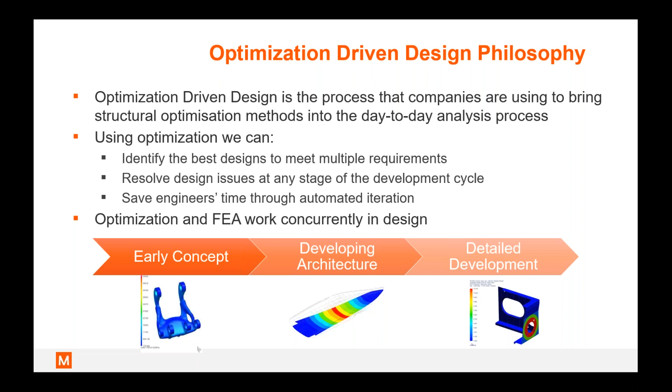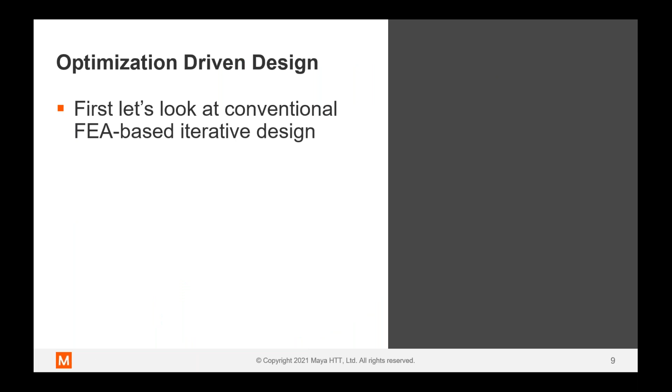So in terms of how it works, what we're talking about when we're referring to this FEA-based optimization philosophy, if we first start off by taking a look at what we do already. Now, this in itself is an amazingly powerful workflow using simulation tools to predict performance and to engineer in the virtual world. This is something you'll see in Simcenter as a very broad spectrum of capabilities. You've seen some in our last webinar as well. But here with FEA, this is the workflow that we typically follow.

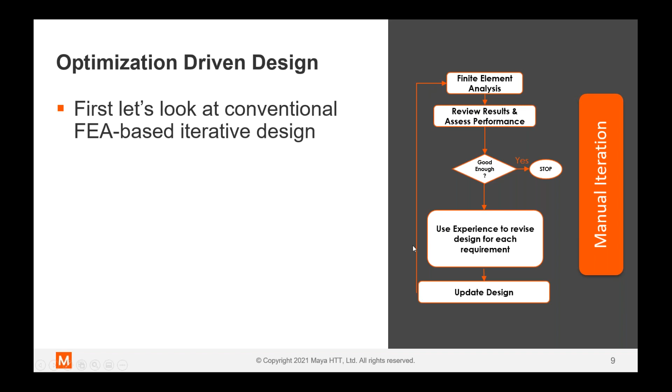So we'll do an FEA simulation. We'll take a look at that performance. What are our stresses? What are our displacements or natural frequencies? How is the part performing? And then we go through and we say to ourselves, is this good enough? Is this meeting our performance target? If it is, we stop. If it's not, then we're going to use our experience and maybe some calculations to make a decision on how we're going to revise a design before going back to design, updating our master design or making some manipulation of our models and redoing the simulation. So this is pretty much how it's done through simulation, iterating your designs.

And if we take a look at optimization, the flowchart now I'm showing is one that's describing what's happening in an optimization solver, in the ones that we're going to be talking about today. So really, similar things going on, just with some different names and some different tasks. So we do our FEA analysis, and then we're reviewing now what we're going to be calling our goal or objective, and also checking our constraints. So that's essentially the optimization, reviewing performance. Then we look at convergence. So that's the optimization evaluating, is the performance meeting the criteria? Do I think I've got it as good as I can?

And if I do, I stop. And if I don't, then we're able to internally calculate sensitivities, which is how a design response changes to a design change. And with that information internally within the optimizer, it will then perform an optimization to say, how should I change the design within certain limits before automatically updating my design and looping through to analysis.

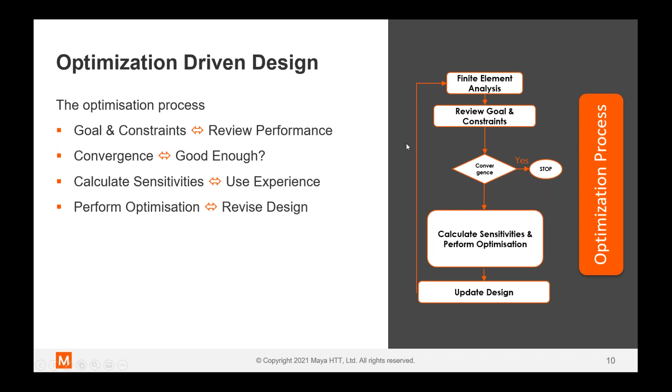So essentially, if you put the two processes side by side, they're really very similar. Some of the key benefits with the one on the right are it's automated. So we're automatically evaluating responses. We can automatically update our design and remove the need for a human to have to iterate in the process. And the key thing here is obviously communicating the right information into the optimization tools so that it is iterating in the right way and going in the right direction. And that's part of what I'll aim to discuss and show you today.

And one of the key strengths you'll see with the optimization solvers is their ability to consider multiple load cases. This is a really important one and a big one, particularly on EV systems, where there's a lot of competing requirements that we need to satisfy in our design.

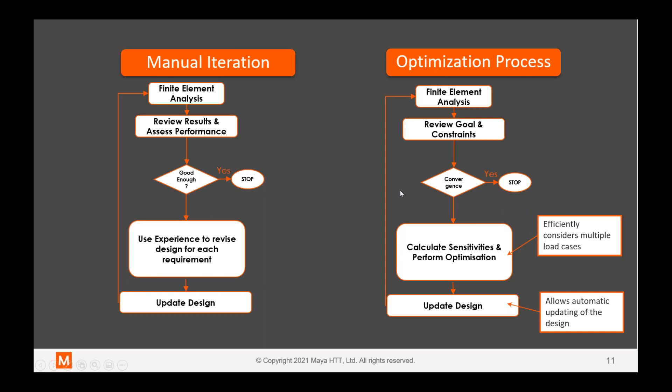So why should we use these tools? What's the benefit for us, really? Why do we want to take it on? First of all, when we use them correctly, we can develop designs faster. In theory, better designs at the same time. And what we're often doing is looking to maximize the potential of our designs, particularly focusing on the manufacturing method, the design approach that we've assumed for the design. So good examples would be a casting, where we can tune and tailor the thickness of a part. With castings, we do have that flexibility. So taking advantage of that and connecting that flexibility in manufacture with a tool that can really make the most of it is why we should use optimization.

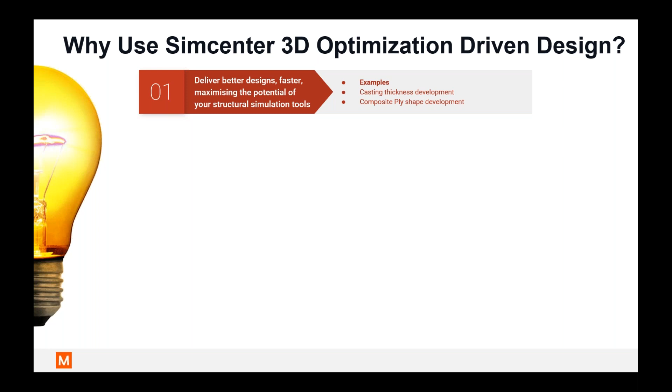And if you are working in the field of composites, we won't discuss it much today. There's a lot more to be discussed in that arena. But if you are, optimization and composite materials really do complement very well because of that inherent flexibility in the material and how you can tune and tailor the performance of your structure. And you have an optimization tool that can manage that within it.

A big one that's often not talked about with optimization is saving time and freeing up engineering time. If the task is to iterate the thickness of a part, doing that through simulation after simulation takes time, and setting the goals to an optimizer and asking it to do it for you simply frees up that engineering resource, as well as getting the best design across multiple load cases.

You can see that being able to tailor your design to meet multiple requirements is really quite key. As you'll see in some of the examples, we can optimize for stiffness, stress and vibration all at the same time within the optimization, developing the best compromise against these requirements.

We often talk in optimization about minimizing mass. This is really key when you start looking at mass budgets for electric vehicles. If you go a little bit over on each of the different systems, all of a sudden the total vehicle weight is escalating, so keeping that in control is key.

It also lends itself to material usage reductions, which inherently lead to cost reductions. So even just something as small as a 5% reduction in material can have a really significant reduction in material costs in manufacturing.

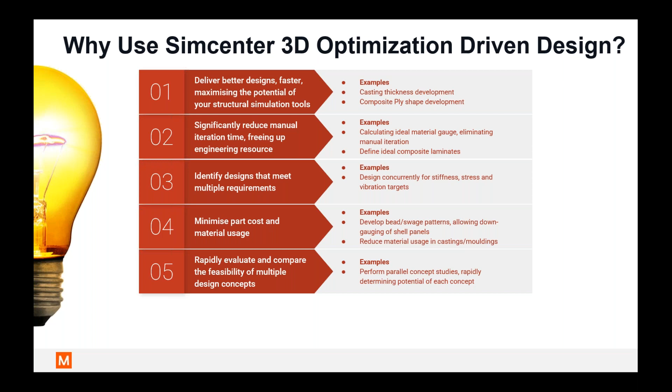In terms of using these tools, my personal background is I've used them a lot in competition applications - areas such as Formula One and motorsport, and in marine with the America's Cup. In that arena they're really focused on performance, that's the driving metric - can I get a little bit more performance to go and win? But the tools themselves are so much more than that. They're making the engineering process more simple, solving problems, reducing material usage, and saving you time along the way.

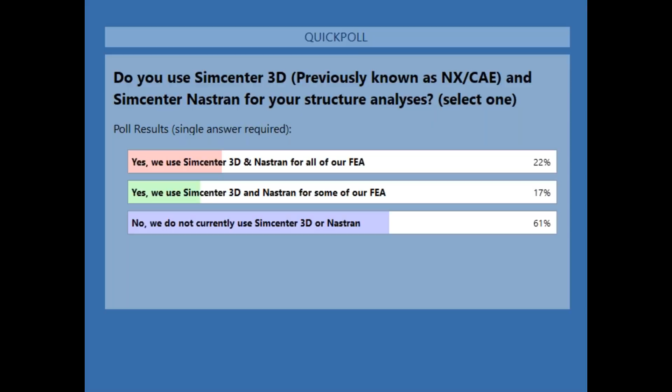Excellent, okay, so that's great to get that feedback. Before I go into these next few slides, it helps me to understand the audience and what I need to be updating in terms of the tools. So I'm going to give just a short introduction, a few slides now on Simcenter 3D, Simcenter Nastran, and OptiAssist, which is the product we're talking about here for the optimization technology.

So the big question is, what is Simcenter 3D? Even if you're not using it, maybe you already know what it is. When I got involved in working with Siemens and Simcenter 3D, and I went to their first conference, I was amazed at how many disciplines it covered and how comprehensive it was. You can see on the image on the left the different arenas where simulation can be performed within Simcenter 3D.

And the key basis of it is this common engineering desktop to perform these simulations. That's a really key strength. So you can be running from a single design out to the different disciplines and different solutions, and each of these has some significant, powerful, and reliable solvers for each different discipline.

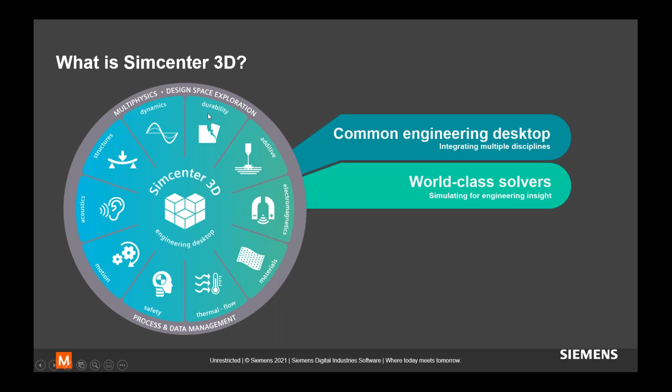Today we're focusing, where are we on around the clock? In structures - that's the primary area for today. But as you can see, particularly for EVs, this is really a powerful set of tools.

From my experience, the biggest strength of Simcenter is its integration of all these tools together, having the ability to manage your design within NX, if that's your chosen design platform, and then connecting through to Simcenter is really key. But even if you're not in NX and you're just working in the Simcenter environment, having that common platform is really a key strength for managing your data and connecting all these simulations together.

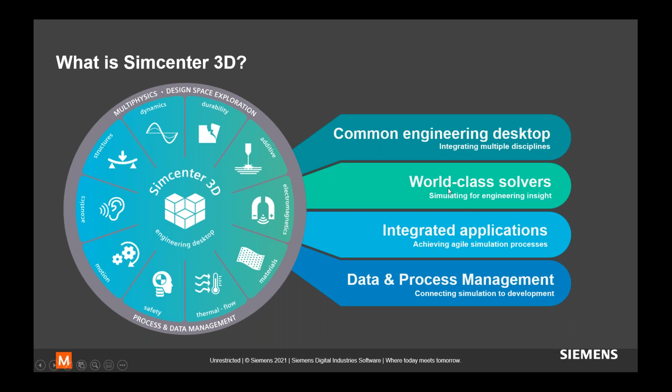So in terms of what this means for EV developments, that's quite an important question for today. The key thing with engineering electric vehicles is there's a lot of technology and methods common to IC engine vehicles, but also a lot of new technology, and simulation techniques are developing all the time. If you joined us for our last webinar in this series, you'll have seen some methods available for battery modeling in terms of various calculations for thermal management, energy calculations, and so on.

Further to that, as we'll go through today, it's got real depth of tools for structures, but also in terms of motion, driveline simulation, dynamics, acoustics, and EM calculations for EVs. So really quite an extensive range of tools for all of your simulation needs.

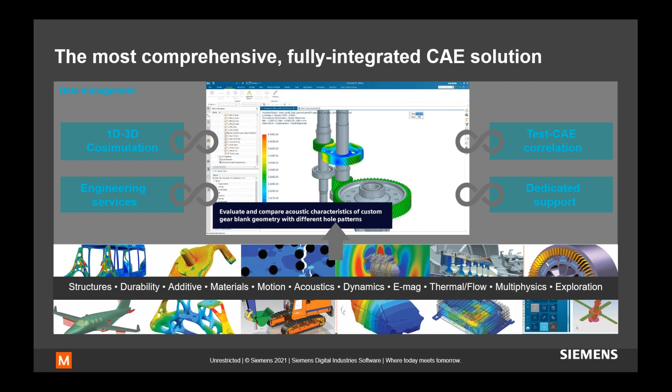So I guess, how does that help you? That's the key thing, really. I think the key thing is the tools allow you to model either using efficient, lean simulation tools to get fast simulations, or to delve into the detail if you want to and model in great detail some of the complex systems in your designs. So that's all available to you in the simulation tools available in Simcenter 3D.

These last two points are quite significant for what I'm going to talk about next, which is how the tools are all integrated together, which is where OptiAssist fits into Simcenter, and we can explore our designs through the optimization tools we're going to be showing you in just a moment.

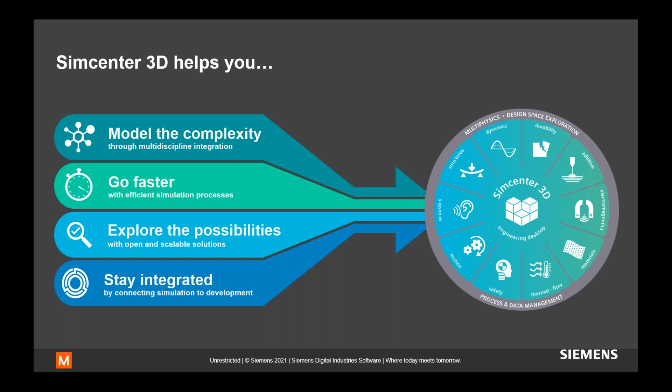So that leads me on to OptiAssist. As introduced, I work at GRM Consulting, a company in the UK, and we are a technology partner to Siemens Digital Industries. We develop OptiAssist for Simcenter 3D, which is an extension to the Simcenter environment, bringing structural optimization tools available to you within Simcenter.

Really, what we're looking at on the screen now is how the tools enable you to change your design. In each case, you're going to be setting a goal for the optimization you're trying to do - minimize mass, maximize stiffness or frequency - and then you can set constraints and targets to meet. But in each case, you want to tell the optimizer how you can change your design, and that's what we're looking at for these methods.

These will become more apparent in the demonstrations I'll be going through shortly, but just to highlight briefly: we have the ability to add form to thin structures, to optimize for thickness on each panel, to optimize through varying regions of your structure for castings and moldings, to tune the geometry of a design through FreeShape, and then to optimize your laminate definitions in composites.

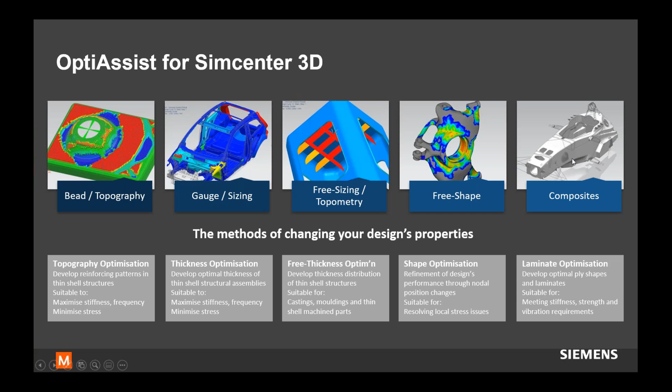So on to the question itself, lightweighting EVs. Where can we use this technology, and what do we want to lightweight? If we take a look at our systems, one we will look at today is lightweighting your battery housings. We're not going to look at the battery technology itself - we want more the housing, which has to be really quite a strong structure. There are a lot of different international requirements for the battery housing and its structural integrity, so you've got to make it strong but manage the weight at the same time.

Next, the EDU, so the transmission housings. These are often very large, heavy castings, and there's a lot of torque going through these electric drive units. So managing and maintaining the stiffness is really key, along with the strength of these housings. Again, maximizing the efficiency of your materials is going to be a key area to take advantage of. Suspension components - we'll also look at that today.

EVs are not always the lightest vehicles. I think we all know the challenges we're facing with the technology we have to carry on board. So making sure that we maximize the efficiency of all the suspension components so that they're strong enough, stiff enough, and yet coping with the loads in a weight efficient way.

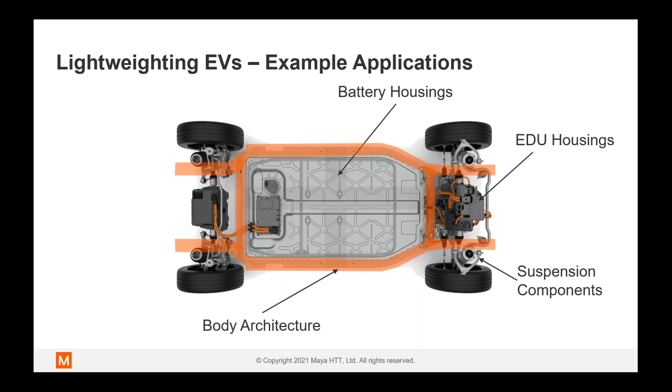And then a pretty major one, a lot of OEMs focus on this because of its inherent nature as the fundamental backbone of your vehicle, and that's the body architecture, the body in white of the EVs. This is a different architecture logic to conventional ICE engines because of the platforms and the systems we're embedding, and you see that with the developing vehicles out in the market today.

And then lastly, something that's often not really focused on, but there's a lot of mass to be saved, which is the interior structures. So here we've got seats, center consoles, instrument panels, a lot of metalwork underneath to manage, and even the trim parts themselves can be managed. So there's real opportunities for weight saving in this area as well.

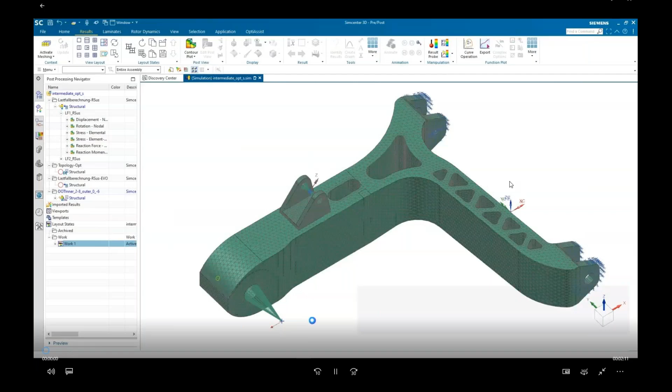Now, they've used the techniques for several applications, but what we're going to focus on now is just one demonstration of how they've used it in one of their earlier developing parts on a suspension swing arm. This is the rear swing arm for their single rear wheel in their solar vehicle, and this has been simulated in NX and Simcenter 3D.

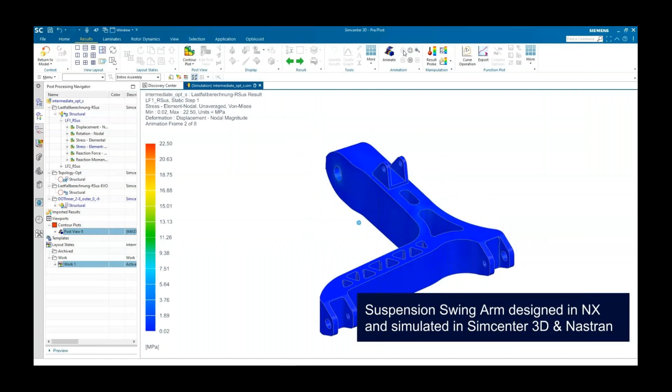Here we're just going to take a look at two of the load cases that they're studying: a vertical load and then an axial load that actually causes this lateral bending of the part that you can see on screen now.

So in this particular instance, they have developed the part such that it is now meeting performance, and they want to investigate how they can maintain the stiffness of the part but take some weight out. This is what they're going to do.

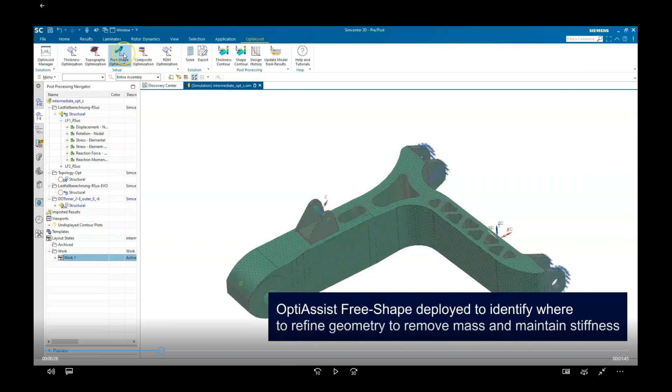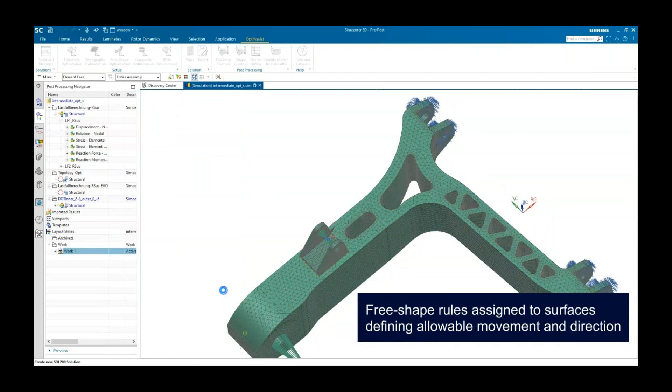They're going to utilize OptiAssist free shape optimization technology and allow it to make changes to the surfaces of the part, adding or removing material in small amounts, to see where it wants to refine the design. First, you can see on screen the inner holes are allowed to move in and out by a prescribed distance in their normal direction. Then on the outside, only selected regions can be moved, again by plus and minus 3 millimeters.

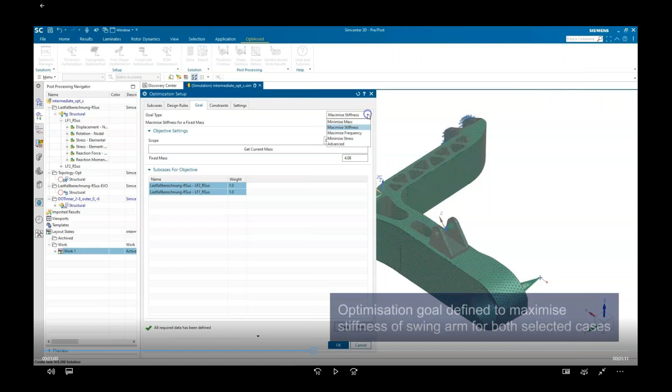So in terms of what they want to do, as you can see in the interface, we're walking through the setup process, and this is how the optimization is set up. In this particular example, they're looking to maximize the stiffness of the part, so you just choose that as the goal for the optimization.

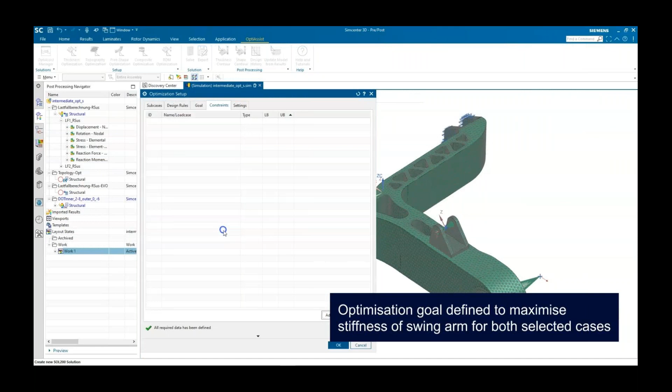Then what they've done is said, well, I'm going to define a mass for the part that's 15% lower than my current mass, so go and be as good as you can. That's the target they want. In this particular example, they haven't defined any specific constraints for stiffness or stress — they just want to make it as efficient as possible while achieving that 15% saving.

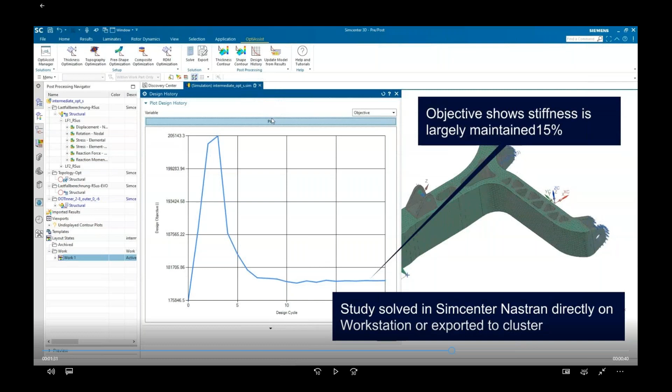At this moment, they've run the optimization within Simcenter Nastran, and once they've got the results, they're plotting their objective function, which is their goal, and they're also looking at the constraint, which in this case is their target mass. What you can see in this graph at the moment is, while having an initial increase in this compliance response, it's then brought back down again to almost its original position.

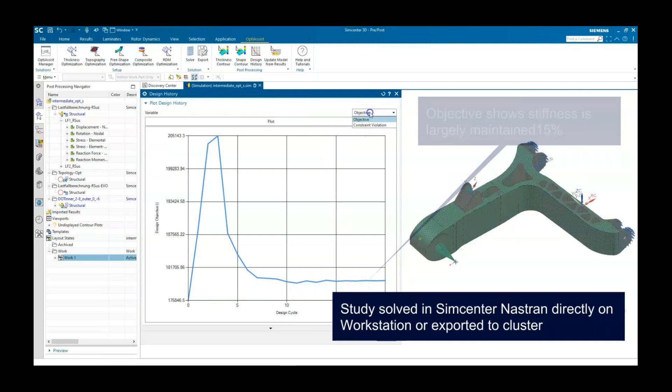So we've seen largely no change in the stiffness of the part, but the constraint, which was our mass, has been reduced from a violation of 15% down to 0, giving us that improvement in weight reduction.

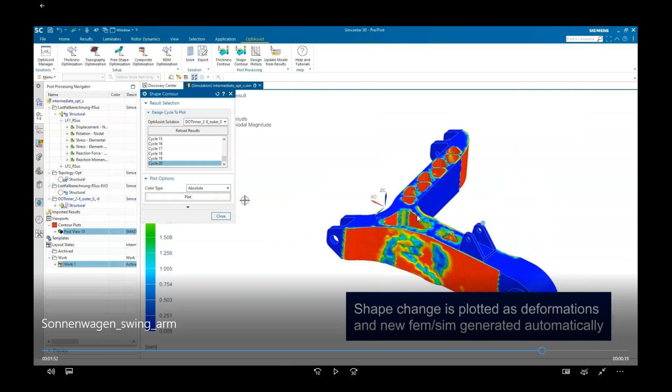And what you can see now on screen is where it's looking to change the surface position. Anything shown in red is where it's moved material either in or out—in some cases to reduce the mass, and in other areas around this hinge point it's actually brought material out to improve the stiffness.

And then once they've got that, if they want to surface that back to design so they can engineer around it, they can update their FEM and SIM directly from the geometry, and you can see how the mesh has been moved away from the surfaces to identify that best updated geometry.

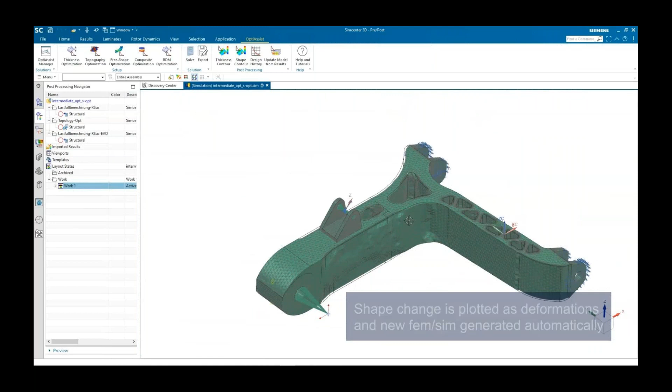So it's as easy as that, really. And actually, all joking aside, it is as easy as that. It's not something that is separate to your day-to-day analysis. You're doing the simulation anyway. You've got this model in Simcenter and you've analyzed it in Simcenter Nastran. To add the optimization in there, it really is straightforward.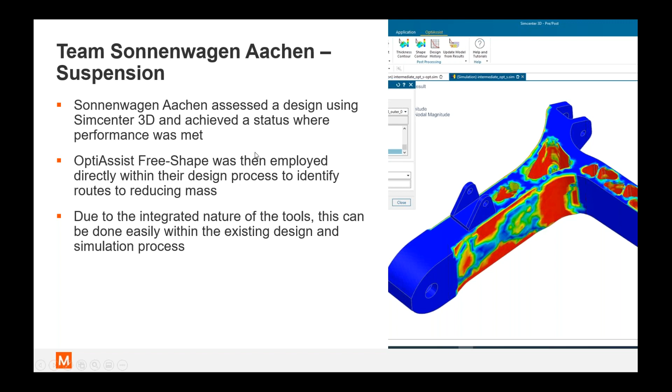So they've applied this to several of their mechanical systems, metallic mechanical systems, but also in their composite laminate development as well. And through taking this approach across the design, they've been able to engineer their latest solar vehicle, Challenger, which is the Photon vehicle, to a total mass of just 180 kilos. That's really, really impressive.

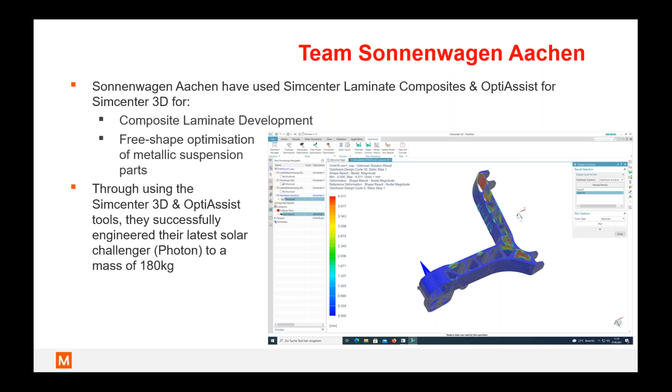And there we go, they even made one like that. So if you can take the time to stare at that, you'll find that various surfaces and these different wall thicknesses have been tuned based upon that free shape optimization.

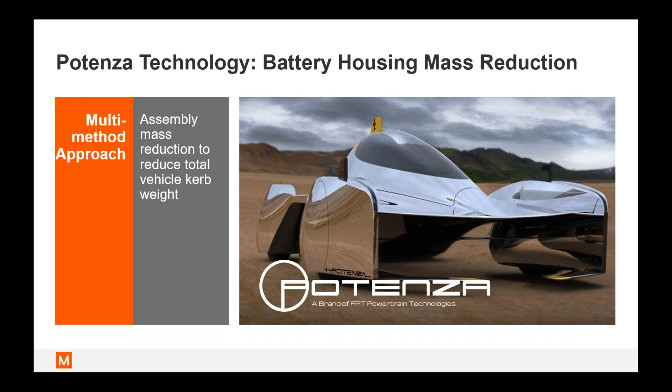Okay, so now we'll move on to our second example, which is the battery housing. And this is titled mass reduction, but actually it's a little bit of problem solving and mass reduction at the same time, as you'll see in a moment.

So what we're looking at here is this battery housing, which is a mixture of a cast main housing. Batteries are inside, various mounting arrangements, and then a cover plate inside. Now, in this particular application, they're looking to meet the ECE-100 safety regulations for batteries and battery housings.

So this study is focusing on 3 strength cases: a 10-ton crush load, which is a pretty heavy load, then 15G acceleration loads in vertical and 28G acceleration in lateral. And further to that, none of the housing or assembly must exhibit any vibration modes below 50 Hertz. So that's something to resolve.

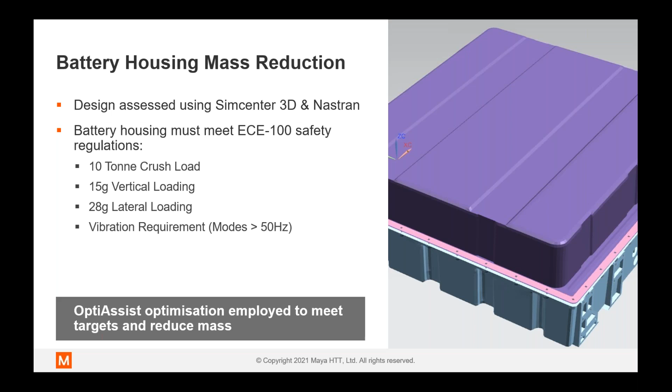And that leads us into the first part of this application. So this is 2 different studies performed on this assembly. First of all, it's looking to resolve a modal issue they had with the battery housing cover, where at the initial assumed thickness and design with some fairly simple swaging, not too much, it was down at 26 Hertz, so well below their target. So here they deployed topography optimization, the process of moving the form of a thin structure to see how they could resolve that issue.

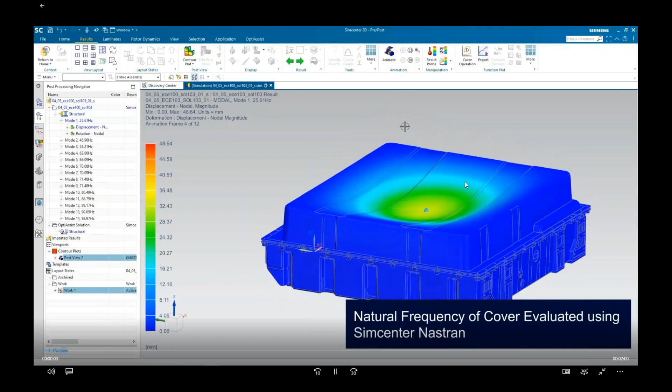So here's the mode in question—pretty clear first mode of the battery housing cover, which is at 26 Hertz.

And so what they're doing is using the topography optimization process inside SimCenter and OptiAssist. And again, you'll see this common workflow in each of these demonstrations—the common flow of setting up and managing the optimization inside SimCenter and OptiAssist.

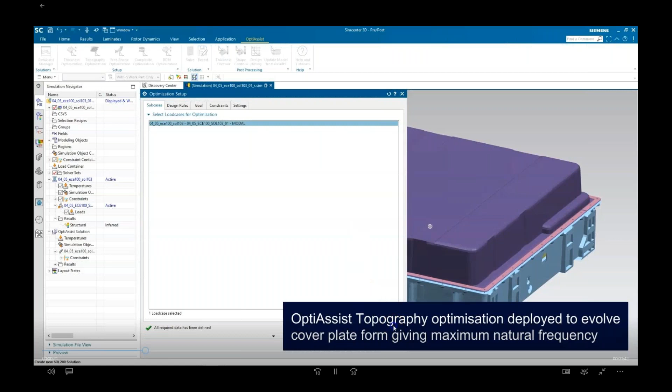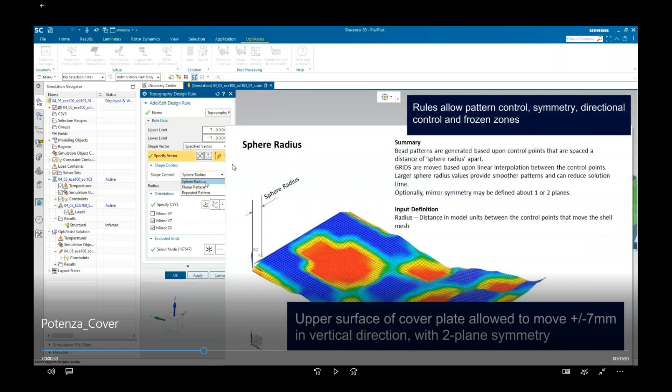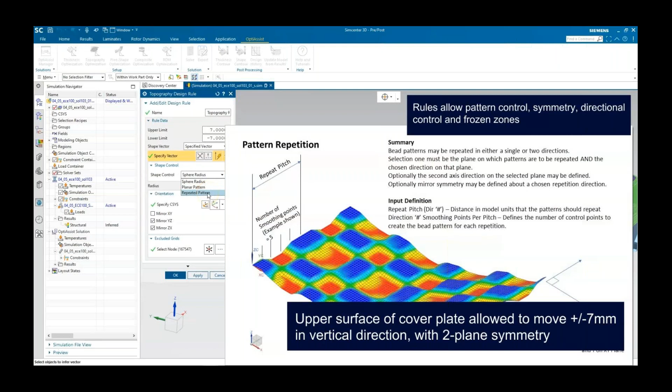So here, just the single load case of that first mode. And then for topography, what the user does is assign rules to the different mesh collector panels. So here, what we're looking at is the ability to define how the optimizer can change the form of your part—we're saying I can move plus or minus 7 millimeters, so not too much, but you can get that significant gain in that, plus the direction and the mirror symmetry. And here we can set different rules for pattern repetitions or linear patterns in the construction of the form that's being created. So here we're keeping it relatively free, but we're just adding mirror symmetry about 2 planes, as you can see have been selected in this particular example.

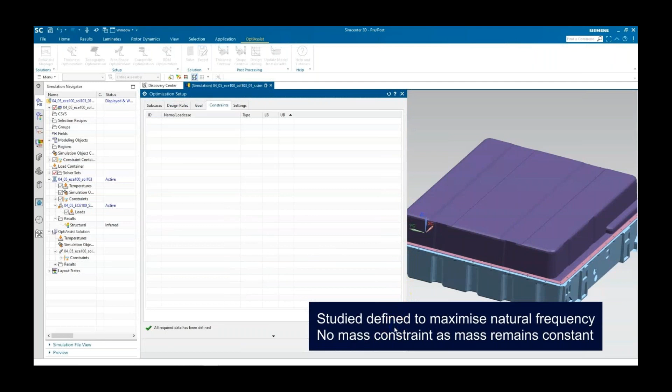Okay, so once assigned, here our goal is maximize frequency—nice and clear, we know what we want to achieve. And then the rest of the setup is straightforward.

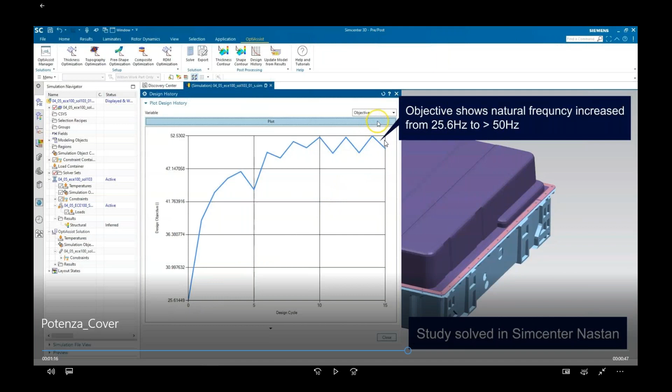So again, this is solved. You can see the buttons of solve or export. You can run it on a cluster, or you can solve it locally depending on how your systems work. And this graph is now showing the optimization objective or goal, which has gone from our 25.6 up to a frequency above 50 Hertz as our target.

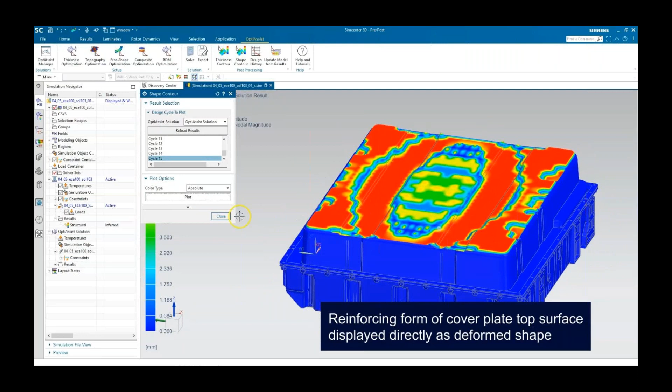So we can evaluate how that looks. Take a look at the last cycle of the optimizations - there's 15 cycles it's taken to solve that. And here you can see the form it's developed. Whilst there's sort of a level of noise and pattern over it, there's a very clear form that you can interpret around, and that's exactly what they've done in this solution.

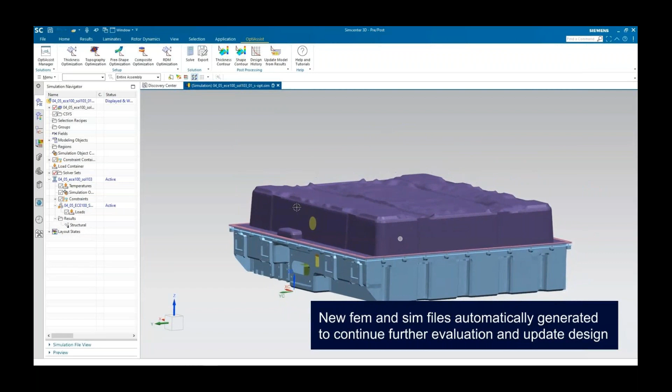Again, you can update that form directly inside Simcenter, so you can generate a new sim and fem file with that geometry, which you can then overlay with your design and develop around it.

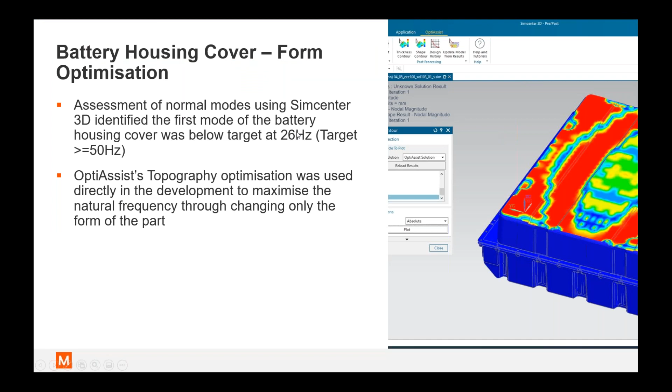Great. So just to summarize that particular study, you can see without having to add any material at all, it's the same part, just moving that form, we've resolved that frequency issue. And in terms of how it's interpreted, sometimes it looks a bit daunting, but you can see here these sketches are pretty much what it's telling you to do. So having a nice clear, rather than a classical straight form, having a curved depression in the section is more efficient, and then edge swaging in the form.

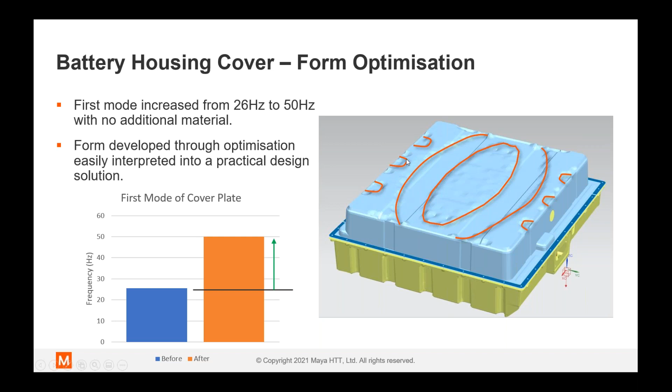So next, we are looking at the main casting itself. This is a little bit further downstream in the development. So the design is now meeting the targets, but there's not really been the time or effort spent to explore, can I make it lighter? And that's where do you start - you've got the first mode of the batteries bouncing inside the system, you've got these 3 different strength load cases. So to try and iterate them and assess each one individually is where you tend to just stop.

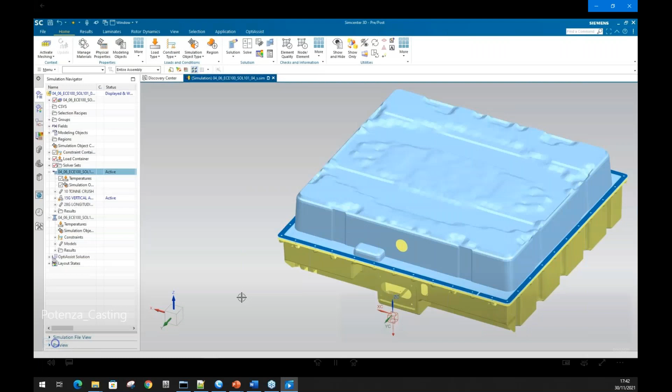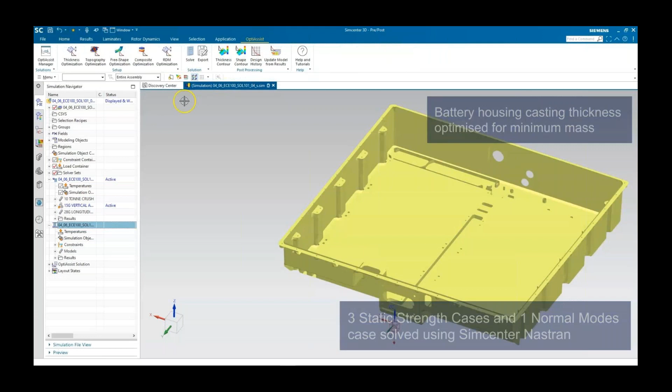So here you can see how this process of managing the multiple load cases is able to be done. Here we're inside Simcenter with a Nastran solution, and we've actually got 2 studies. One is our static solution of our strength cases, and the other one is our modal analysis. This is the part we're working on - a fairly large casting that's housing the batteries, and now we're using the thickness optimization to work on the setup.

So as opposed to the vibration problem, first of all, where we had 1 load case, you can see now we're going to be considering the 3 strength cases and the vibration case. Let me just go back a moment so we can see that.

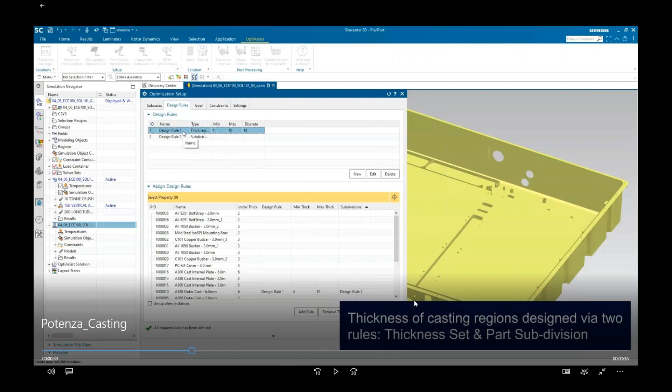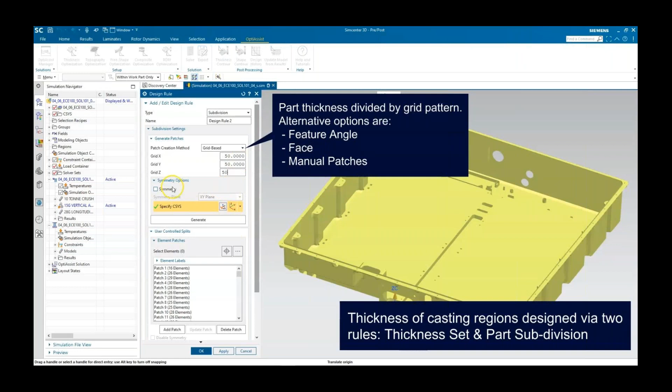So in a similar layout to the topography approach, thickness works in the same way, where we create rules on what we're going to change, and then we assign them to the mesh collectors we wish to design. In this case, we're going to be changing the thickness between a range, as you see there. And then we're also going to create a second rule, which is called subdivision. You can do this in many different ways - either by geometry face, manual patches, feature angle, or in this case, just a simple grid in space. That gives it good freedom.

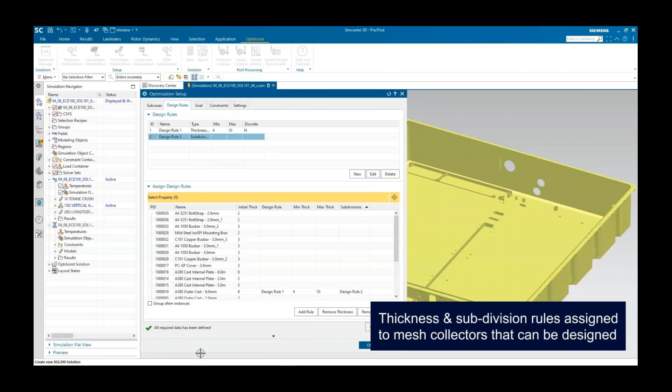And here you could start to choose whether it's a local orientation of the splitting, whether they have mirror symmetry and so on. These small patches you're seeing on screen are the different regions where thickness can be varied, so you have the ability to control that yourself. Depending on how much complexity you want to add or not is how you can develop your design.

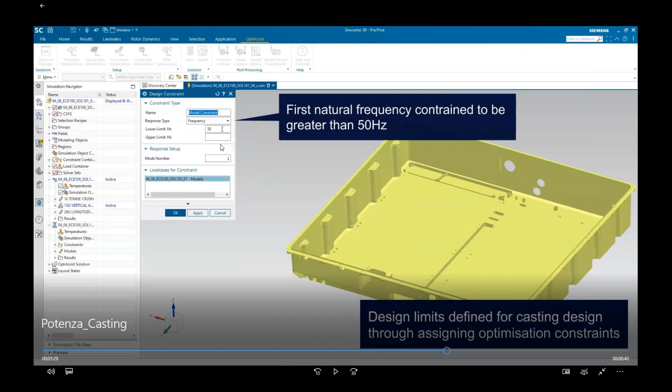In this instance, we're looking to minimize mass as our goal. So with that in mind, we then need to set some constraints that it must meet whilst minimizing that mass. First of all, we're setting a target that the natural frequency must be greater than 50 Hertz - you can see you can choose which mode, so if it's not the first mode, you can set it to an alternate mode. In this case, it is. And then secondly, for the 3 different strength cases, we want to constrain our stress to 125 megapascals.

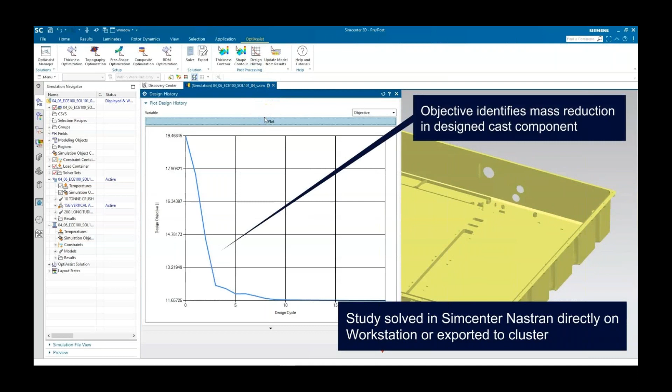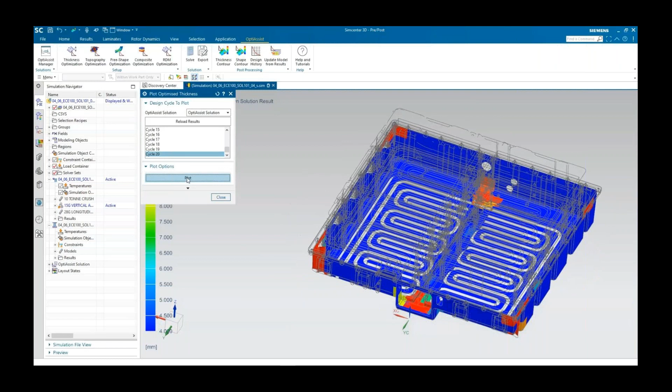As ever, that's then solved in Nastran, and we can look at our results. In this instance, the objective is your mass - that's what we set as our goal. So you can see now how that's been reduced, and we'll look at a summary of that in a moment. Then we can go ahead and review that thickness, and really it becomes pretty clear that with the right placement of thickness in a few key areas, there's a lot of flexibility to reduce material elsewhere and still achieve those strength and vibration targets. So really a good example of how that technology works.

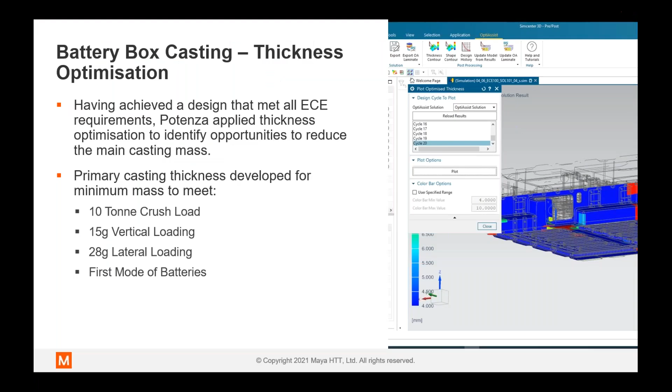So just to summarize the whole study, through that exercise there's then a little bit of interpretation, which is working with optimization coupled with your engineering brain. They've ended up with a design that is 7.5 kilos lighter than they were at, and we've resolved the design issues, the performance issues along the way.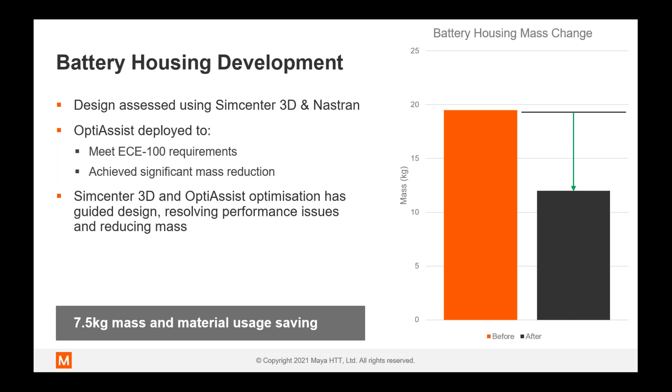Lastly, I'm going to talk to you about a developing technology within our SimCenter-based OptiAssist tool, called RDM - the reinforcement derivation method. This really utilizes the technology of topology optimization. Some of you may be very familiar with that technology, some may not, but topology allows you to evolve the layout of structures from a package volume.

What we're trying to do here is not just start from scratch, because it's very rare that we start from scratch with a design. We're often developing with commonality from different platforms or systems, but as we're developing we have issues we want to resolve. So being able to leverage topology in that workflow is key.

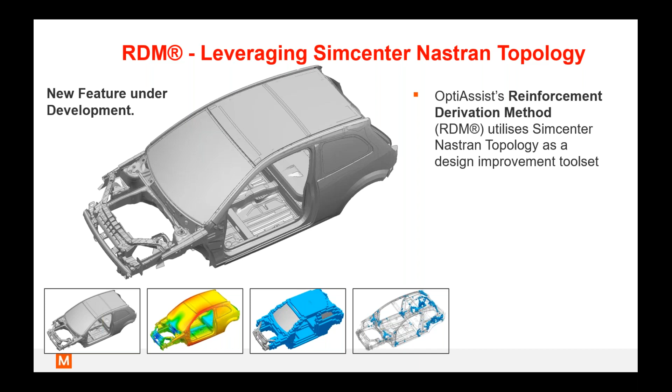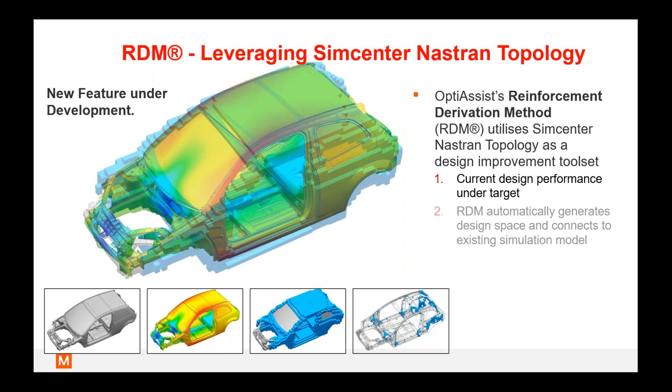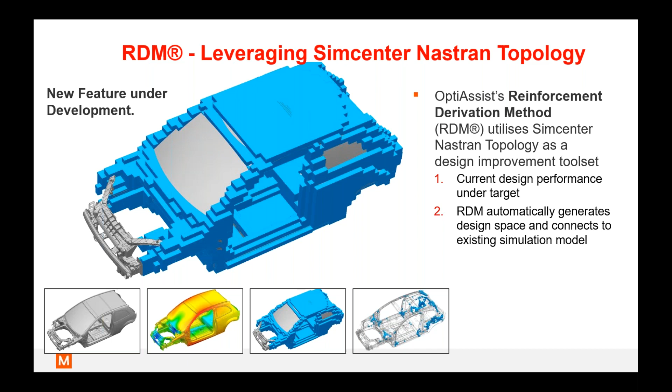If I take you through how it works: first we've got our simulation of our part. Then we want to understand, if I'm not meeting my targets, what have I got to do? The RDM interface in OptiAssist will automatically generate candidate material for you within a set of rules. What you see on screen is called a block search - it's immersing your design in candidate material and connecting that candidate material to your structure. Then you run the Nastran topology optimization with set targets, and it will identify where you want material.

In this body architecture example, what we're seeing isn't that we want blobs of material added, as you see here, but this is identifying where you want to put your engineering effort. In some instances it might be a new load path that's efficient to do; in other areas it might be reworking geometry. Once you look at it, it may become apparent. And sometimes with very small lumps of material you see here, it's just saying I need to improve my connection strategy between parts - that's a key process in itself.

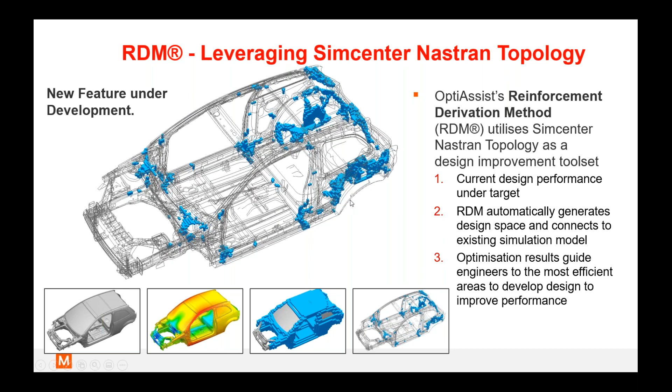You can see this process in action in other parts too, not just bodies, but in systems. Here we've got a clutch housing as an application. If we take a philosophy from the outset that we're going to use this technology, then we design a part, as you see on the left, as a minimum envelope. This is a real functional design, but we're going into it knowing that we're probably going to fail structural performance, though we've got all the functional attributes there.

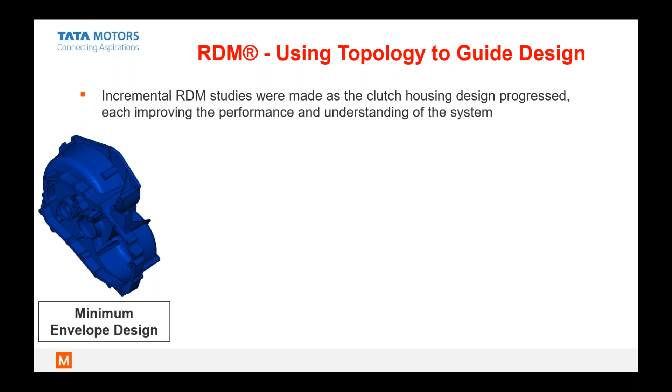So the bearing carriers, the fixing points, the oil retention - we're not trying to make it strong enough by adding and second-guessing where ribs and extra thickness should be added. Instead we use RDM on top of our part in a series of iterative loops.

Here you can see where material was added, and the designer and engineer work with this to develop new details based upon this optimization. You can see the ribs forming as you see here, but it's still not meeting performance - much better, much closer.

So then we combine our interpretation that we could do with another loop of RDM, until we end up with these extra ribs and extra thickness to complete our design.

This particular example was done by Tata, looking to replace an existing part, and it took the previous housing from 6.7 kilos down to 5.7 kilos - a whole kilo off the part on just a single component in the system. Sometimes that doesn't seem like much, but a kilo on a volume-produced cast part is really significant in terms of cost. I saw there was a question earlier about meeting cost targets - a kilo less material in your cast part is a big cost saving.

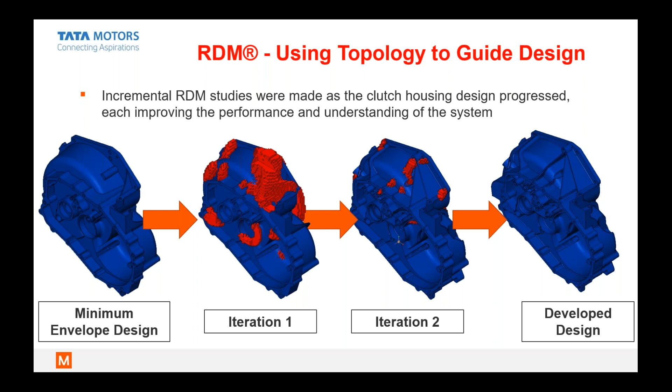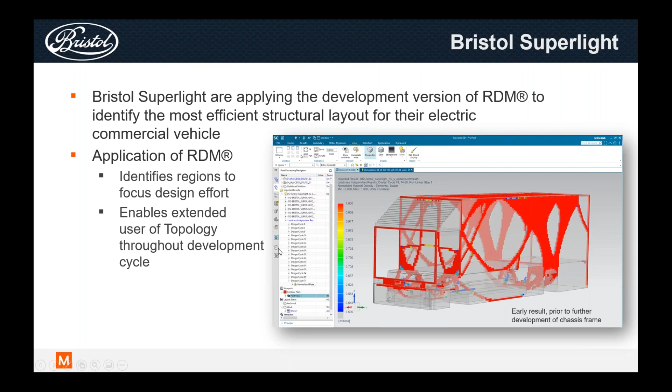Somebody else using this more on the architecture level - this is an early screenshot of some of the work we're doing. As mentioned, this is a development feature of OptiAssist that we're looking to release in the new year. Bristol Superlight have been using it to help develop their architecture, extending the use of topology throughout the development cycle.

Thankfully I'm at the end, in the sense that it's ten to six here in the UK, I should say - so I'm good on time.

Just to summarize, hopefully what you've seen, for those of you using SimCenter or not, is that SimCenter 3D, with the addition of OptiAssist, provides a well-integrated and powerful simulation and optimization tool set for EV structures. With all the different functionality and solvers within, it's a really powerful platform for the different requirements we need to engineer for in the development of EVs.

SimCenter's common engineering desktop does provide that common environment for the different simulation attributes we need to perform. If you're working in NX as well, it's entirely seamless with your design workflows. OptiAssist is that tool that enables you to apply this optimization-driven design philosophy into your designs, and hopefully you can see it's not really a leap. There's very little to go from where you are in simulating to adding optimization. There's no cost to your effort. It saves you time, it gives you better answers. That's really the key takeaway I want to say. You've probably gathered I'm a real big fan of optimization when used correctly and embraced with the right engineering.

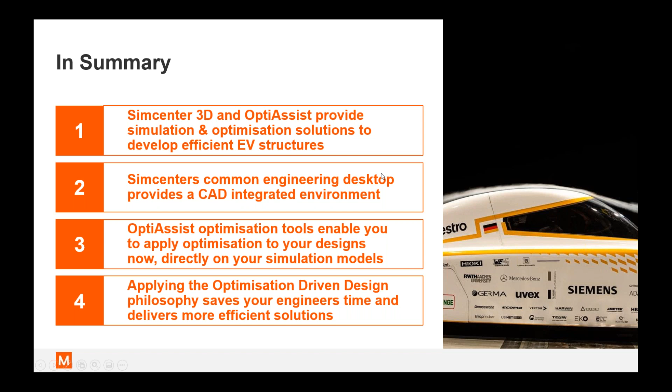We do have a few questions in the chat that we'll take some time to answer, so this might be a quick poll. Folks, the question here is: what is your preferred method of learning more about the lightweighting technology shown today? Would you want a one-on-one meeting, a technology benchmark, doing some training and software evaluation, or software lease or purchase? I'll give you guys a few moments to answer.

In the meantime, I think I can take some time as well to read out the questions that we have here for you, Martin. Can you see the question that's right out there? I'll read it out. I can see a couple there, but please read it out. It's helpful, isn't it?

Are composite materials safely used in the battery elements in the structural design? And if yes, what are the challenges and how are these solved, especially at the battery certification level? So my understanding is that in certain applications they are used. There are challenges. I think one of the biggest challenges in terms of using composite materials is fire safety. It's outside of the remit of the structures that we see today, but there are certain composite materials where the matrix material is actually able to be approved in fire certification, which allows that to be used for battery applications, provided on the structural side that the structure is meeting the integrity requirements. Then there's nothing really to stop composites being used at all.